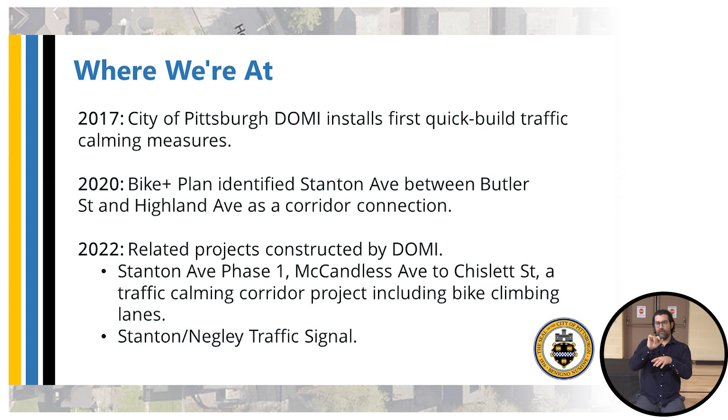So real quick, the purpose of the meeting is to share the safety context and planned improvements along the Stanton Avenue corridor between Chislett and Heberton and Meadow Street. Some of the project background: in 2017, the Department of Mobility and Infrastructure installed quick build traffic calming measures. In 2020, the Bike Plus plan identified Stanton Ave between Butler Street and Highland Ave as a corridor connection, and you'll see that on a map in a second. Adjacent projects were completed in 2022, Stanton Ave Phase 1, which is the climbing lane from McCandless to Chislett, as well as traffic calming. And the Stanton-Negley traffic signal was also completed in 2022.

In 2023, Council District 7, Councilwoman Gross secured funding for Stanton Avenue Phase 2. DOMI started data collection on the project. Last fall, we held a corridor walkthrough with folks from the neighborhood, the council offices, as well as the mayor's office and DOMI. And then, as most of you have seen, in the fall DOMI installed Phase 1 of Phase 2, which were the speed tables between Highland and Meadow.

Now in 2024, hopefully you all have been aware of the news that the city, the mayor's office, and council are recommitting to Vision Zero. Part of that was thorough analysis of our city streets to identify what DOMI is calling the high injury network. It's 10%, I think, of road miles where 80% of our accidents are. And so DOMI's really trying to be proactive in addressing safety issues throughout that high injury network.

DOMI also began Stanton Ave Phase 2 project design, which you'll be seeing today. Just a reminder for folks, the scope of the project is Stanton Ave from Chislett to Heberton with quick build materials. I'm sure we'll hear from folks who are interested in things like traffic signals, but this is really a quick build corridor safety project. And the goal is to calm traffic, improve safety for pedestrians, cyclists, but really all users on Stanton Avenue.

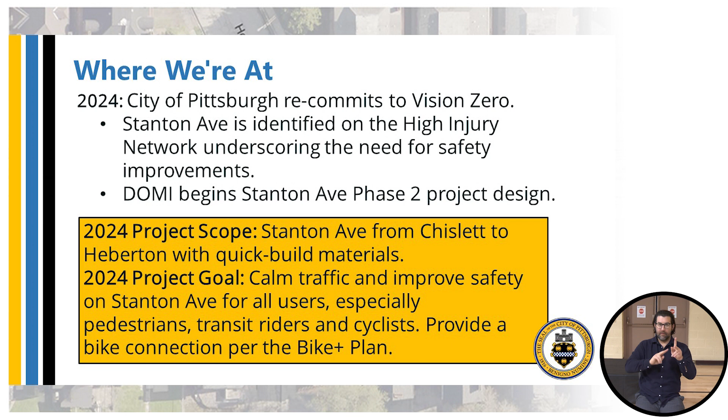Just another quick word about Vision Zero before I hand it off to Paige. We're really on the heels of a really tragic situation in the city of Pittsburgh. 21 people died in our city on city streets last year. And DOMI is really trying to take a chunk out of addressing those safety concerns, which is why we're starting with projects like Stanton Avenue, which are on the high injury network.

Fortunately, we know that things like slowing people down, adding safety elements, speed humps, making pedestrians more visible are things that reduce the number of crashes and especially reduce the severity of crashes. And Paige is going to talk a little bit more about that in the presentation now.

Thanks, Jan. And thank you all for being here today. I know it was a really beautiful day outside, and I appreciate you making the time to be here.

So to give some more context to the street, I know most of you live around here, and this is not news to you, but for those of you that aren't fully aware of the context, I thought it'd be good to go over it. Stanton is a main thoroughfare between mostly residential neighborhoods, although there's a lot of businesses and community centers like this along the corridor as well. There's also a lot of transit access, which I think is an important factor here, not only for East Liberty and Highland Park, but also Stanton Heights and Morningside and the surrounding neighborhoods.

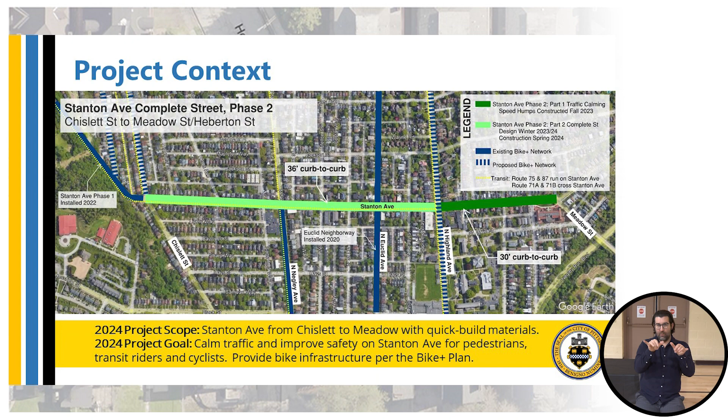So our current conditions are pretty straightforward: 2 parking lanes and 2 travel lanes in the Chislett to Highland area, but then as it goes past, there's 1 less parking lane. It's a little bit narrower. Data that we have collected shows that 85th percentile speed, which is our standard measure, is 32 miles per hour with 68% speeding with current conditions between Chislett and Highland.

And then on the Highland to Heberton part, we initially had 30 mile per hour 85th percentile speeds with 48% speeding. We've already seen a pretty dramatic reduction in that with the installation of the 2 speed tables last fall. So we brought the 85th percentile down 5 miles per hour to 25 miles per hour, at the speed limit, and 28% speeding. We are proposing further traffic calming along there that we'll dive into, so we're hoping that we can bring these speeds down even further.

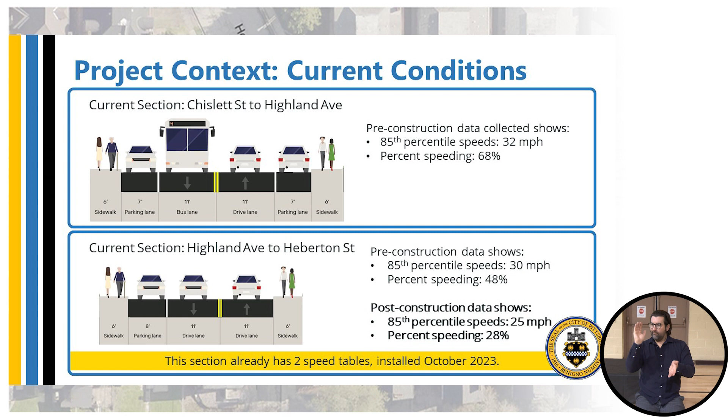I think it's important to set this up by looking at the crash history. There's a lot of crashes here. It's no wonder that this ended up on our high injury network. We tend to pick a 5-year period to be our common analysis, and 47 reported crashes in less than a mile is a lot of crashes. That included 2 bicycle crashes that resulted in 1 injury and 1 fatality, and 4 pedestrian crashes that all resulted in injury.

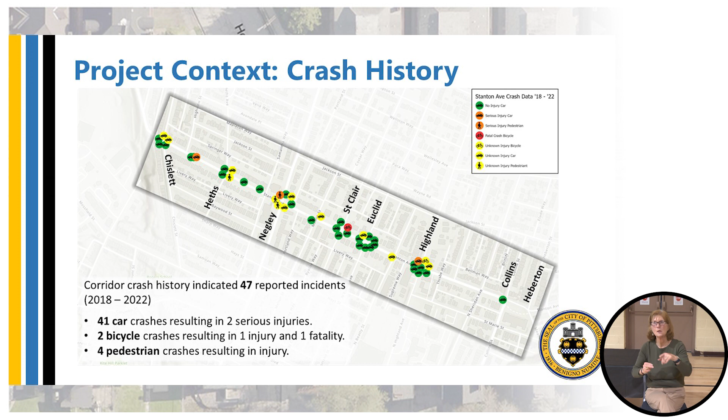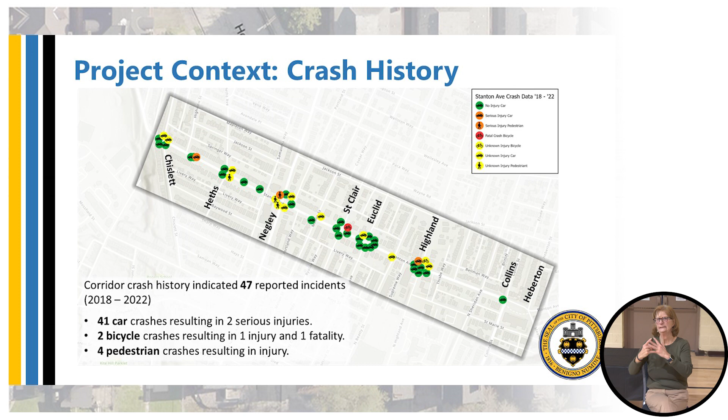Actually, if you could go back real quick, I forgot to say one thing. One other thing I just wanted to note is they're very concentrated between Chislett and Highland. We actually have a pretty big drop-off in crashes once you go past Highland. And the other thing I'll add is that the intersection with the worst crash history is Negley. We are proposing safety improvements there, but this crash data was all collected before we updated the traffic signals, so we're hoping that things are already looking better there, but we haven't been able to analyze that fully because it hasn't been long enough.

So the tools that we have for traffic calming that we're proposing here, the primary ones are always going to be about reducing corridor speeds. So when we collect data, it's always going to be mid-block on the corridor so that it's the average speed throughout the corridor. We'll never collect data right at a speed hump. But we've collected a lot of data while we've been doing traffic calming at DOMI, and we've seen a lot of really good results. We're proposing speed tables on Stanton, which are similar to speed humps, but a little less aggressive.

They're much better for buses and for the high volumes that we have on Stanton. And in other projects throughout the city, we've seen a 7 mile per hour reduction in 85th percentile speeds with these treatments and a 56% reduction in percent speeding.

We've also analyzed bump outs and pedestrian islands, which we classify as horizontal deflection. So rather than a bump over, it kind of forces you to slow down by forcing you to move horizontally through the intersection. These are great because they focus the calming at the intersection. Intersections are where 2/3 of crashes occur, so they're the most important place to see these updates.

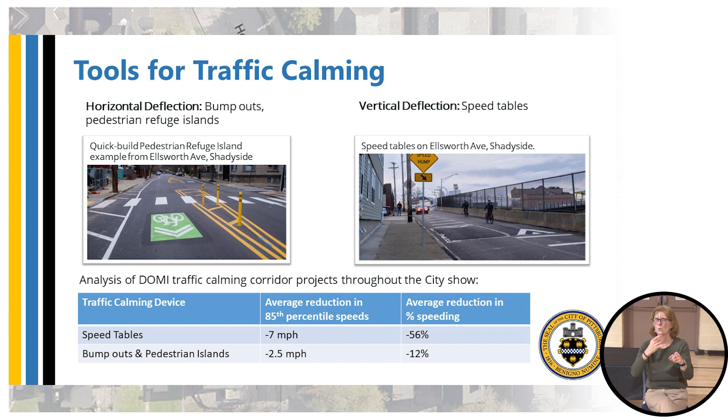And they also can improve sightlines at the intersections and make it easier for pedestrians to cross, especially an uncontrolled crossing, which means there's no traffic signal or stop sign, because it allows you to cross one leg, have a moment of refuge, and then continue crossing the intersection. So we're proposing these at many of the intersections on Stanton, as you'll see.

Some other tools for traffic calming. These are all specific ones that were called out in the Federal Highway Administration's safety proven countermeasures, and things that you'll see throughout the corridor. Adding bike lanes to a 2-lane local road has shown to reduce total roadway crashes by 30%, and that's all users, including pedestrians and motor vehicle crashes.

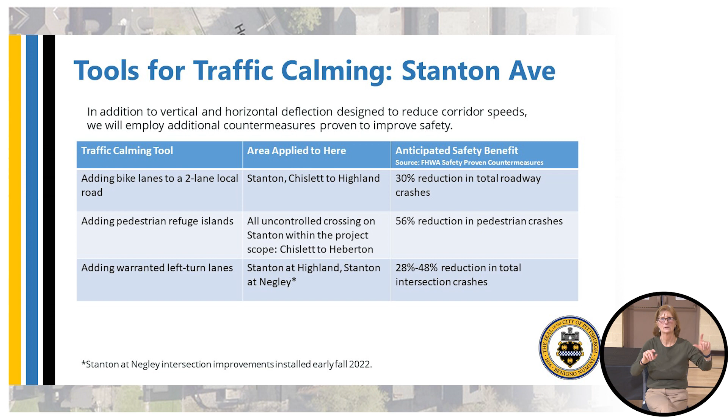Adding pedestrian refuge islands results in a 56% reduction in pedestrian crashes. And adding a warranted left turn lane to a signalized intersection typically reduces total intersection crashes by 30 to 50%, which is one of the things that we added to Negley when we made those safety upgrades at the intersection.

So what we're proposing on the corridor, the biggest change that you will see is that we are going to consolidate parking to one parking lane instead of the two that you currently have between Chislett and Highland, and add 2 bike lanes. We are proposing different sides of the street for which side we consolidate parking. The reason for that is that we know that bikes will be moving slower in the uphill direction, and there is a slight slope change around Negley in the average grade for these blocks.

So we think it'll be best to have the climbing lane, the uphill direction where bikes are moving slower, be the one that's closest to parked cars. And then if you're moving faster in the downhill direction, you'll have just the curb next to you with a little more predictable behavior. And then from Highland to Heberton, we're proposing a shared condition just with these additional traffic calming measures.

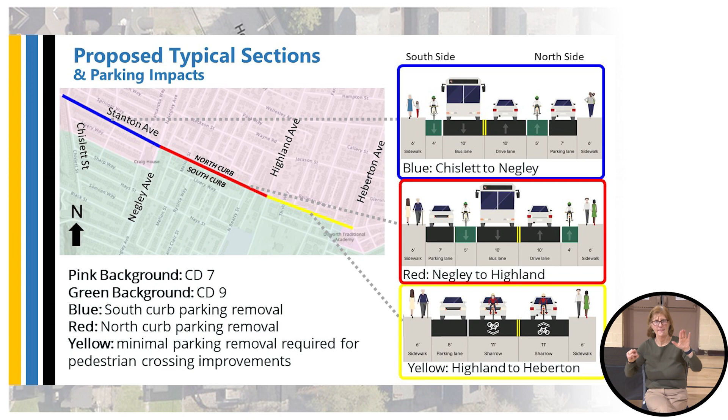So one intersection that we talked about a lot at the walkthrough with the community stakeholders is Heth's Ave. We think that some of the reasons for the less than safe and less comfortable conditions is the angle that Heth's Ave intersects with Stanton. And so we're going to use quick build materials to tee off the intersection and kind of force vehicles that are turning to do so more slowly.

Again, these bump outs are a good example of the improved sight lines where you can more easily see approaching vehicles before you make your choice to proceed into the intersection. It's also a really good example of that horizontal deflection with a pedestrian refuge island. This, like many intersections, is an intersection with a bus stop.

So we're working with PRT. Again, these are not final plans, but we're working with PRT so we can move the bus stop from this near side to the far side. That way we can provide additional protection to that bike lane around that corner with flex posts that we wouldn't be able to otherwise because it might prevent the bus from pulling to the curb. So we're going to work with PRT on all of these designs, but this is what we're proposing now. You also see the bidirectional bike lanes and an example of the speed tables.

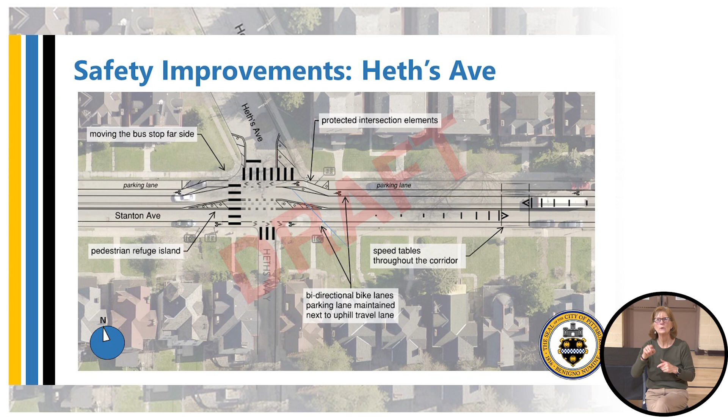Looking at Stanton at Negley, this is where you can see the shift in parking, which side it's on. We think that it's best to shift it at Samantha, and there's a few reasons for this. We're proposing a bus boarding island at the approach of Negley, which would, unlike the rest of this, be made out of concrete because it would need to provide that curb for ADA access and to the buses.

This will do a lot for the safety of the intersection because it will act similar to a bump out by constraining the curb-to-curb width as vehicles approach Negley, and stop some of the behavior we see with people squeezing around to make rights when we do have a no right on red sign there that is often ignored, while providing a lot of comfort for the transit users.

This is the busiest bus stop on Stanton in the project scope. It has the most boardings, so we think it's a good spot to concentrate some of our budget and offer improvements like this.

Oh, I'm sorry, one other thing. Also, we've been talking with PRT, and they're proposing bringing back the POGOH station here in 2025 or 2026. So we'll be working with them to try to find a good spot for that.

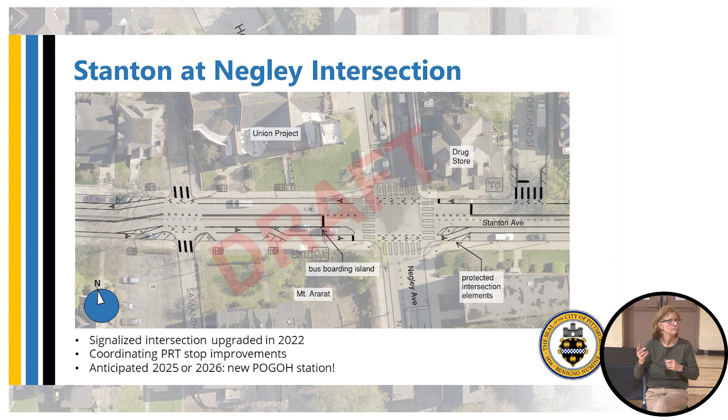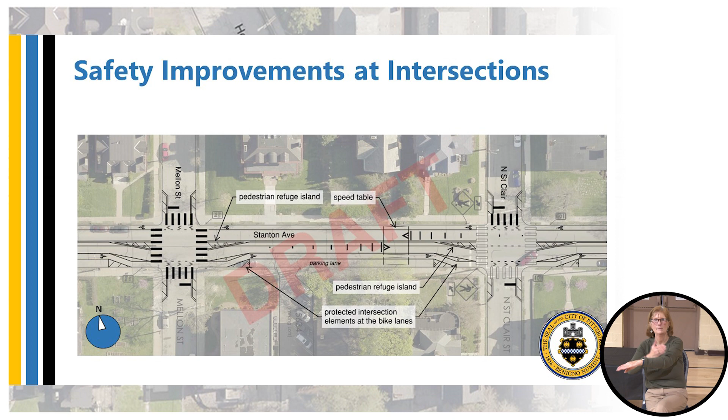I'm not going to go through every intersection, although, like we said, we will be posting the final designs once they're further along. But these are some really good examples of the uncontrolled intersections throughout the corridor. Again, we're proposing pedestrian refuge islands that offer that horizontal deflection we were talking about, the speed tables, some elements of protected bike lanes at the intersections, as you can see, with flex posts. And again, we'll be working with PRT to make sure that all of these work well with the transit.

Stanton at Highland was another intersection that we had heard a lot about at the walkthrough. A few of the other traffic engineers and I did multiple field views here, and we understand why it feels so uncomfortable and dangerous. There's a lot of turning vehicles at this intersection. So we are proposing adding the left turn lanes to North Highland Ave. The reason for this is it's an upgrade we can make that should, again, reduce total intersection crashes by 30 to 50%, according to FHWA.

And the reason it improves safety is because it improves some sight lines, it allows for more predictability, and we think it will increase yielding to pedestrian compliance, which seems to be one of the bigger concerns here, just given how many vehicles are turning. On Stanton, we're proposing protecting the bike lane at this approach, but maintaining the current configuration otherwise.

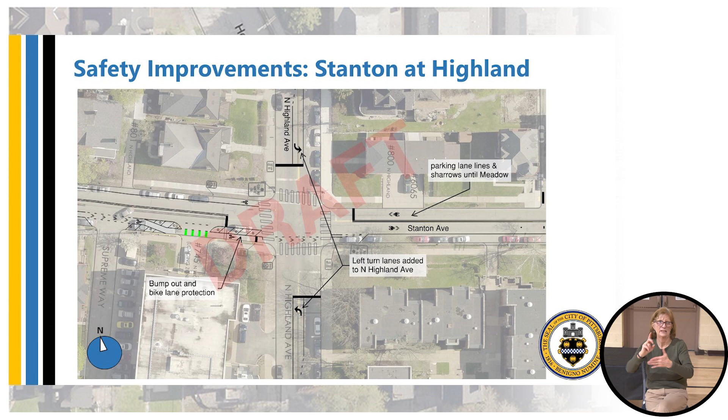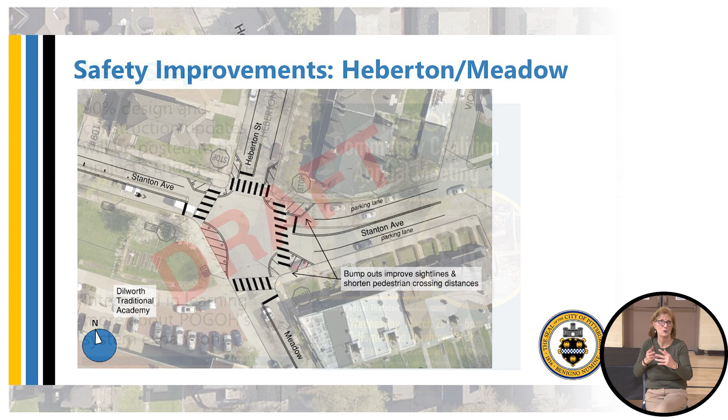So that's the end of the design. We'll take some questions. I think next steps is that we will again be posting some final designs as well as construction updates to the Engage page. So please keep an eye on that. I also just wanted to mention that on the 20th, POGOH is going to be having a large community coalition meeting where they'll talk about the full system expansion, not just the one at this intersection. Thank you.

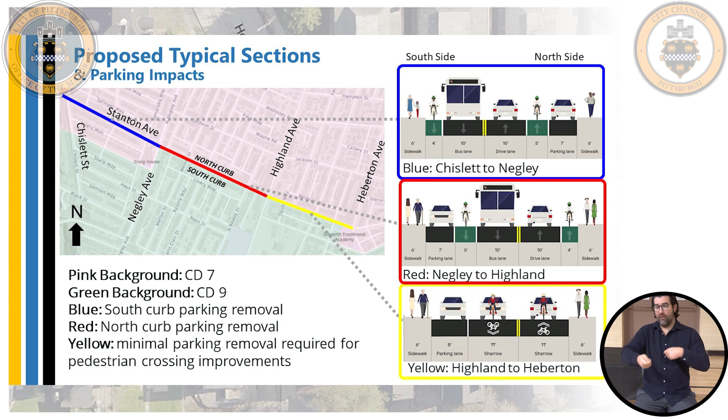There's a question here. Thanks for all the work that you're doing on this, but I don't know if you're strictly forced to just deal with roadways and curbs and traffic flow, but is there any way to incorporate more public trash cans when you're doing the redevelopment, installing the hardware, just because there are pedestrians and dogs around here? It'd be nice to have a few more public trash cans. So the question was about incorporating other things like public trash cans into the design. I'll let Paige give a brief answer, but the other resource I'll offer is our neighborhood services team, if there's spots where you think there could be trash cans, or you can submit that via 311, and it's something that our Department of Public Works can look into. But I'll let Paige talk about it from a project context.

Yeah, well, I don't have much more to add. I work in the traffic division, which does just work between curb and curb, but I think that that's certainly something that we can relay to DPW and our partners as something we'd like to see. I think especially maybe at that transit island. I know that's an amenity PRT likes to have in addition to their shelters, so we can definitely look into that.

All right, question on Zoom. Someone is asking, can you comment on why the intersection with the bus bump out requires cyclists to shift multiple times when traveling in the east direction? This seems like it could be a difficult turn to make, especially if there are people loading and unloading from the bus.

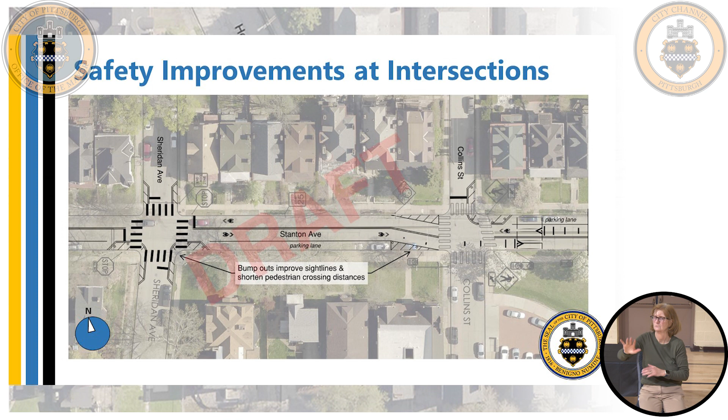I think what's going to be best is if we pull up that slide and maybe Paige can explain some of that better, and show where some of the parking consolidation is as well. It's the very last one. So here's Collins, where we have heard about some of these crossing issues. First, to reiterate, we're not proposing any changes to parking on this section of the street. There's a lot of problems here that are tough to sort out, especially when they're very short-lived. We certainly should be looking at more holistic approaches. I know the crossing guards are up against a lot.

The intersections crossing guards are at are some of the craziest intersections we've seen, and a lot of intersections don't get crossing guards because we're very limited and the schools are understaffed. So there's a lot that unfortunately can't be solved with traffic engineering. But if we can use these flex posts, and go out and do some field views after we've installed them to make sure people are not able to park on the sidewalk or in those bump outs as they approach these intersections, because, like we were talking about earlier with short people, we need those sight lines more than ever.

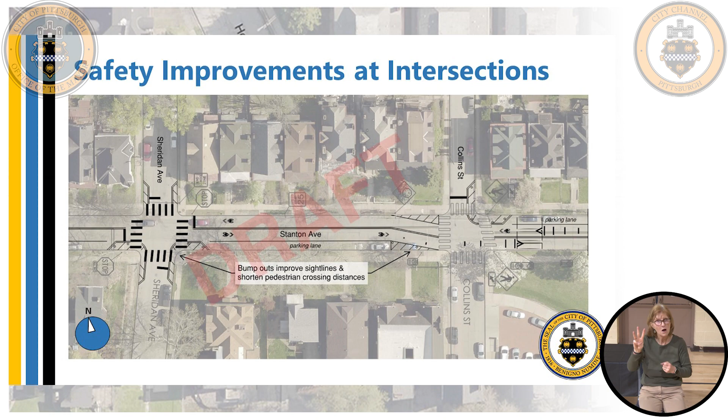So I think if we need to, analyze how this is working, see if we can work with police on targeted enforcement to make sure that those parking laws are being observed, and see what we can do, because I think the goal of this project is to reduce chaos. I know that sometimes there's too much chaos and maybe it'll become too much for the traffic engineering to really fix. But I do think that these designs will definitely not make the situation worse and should make it better, at least with what we can do within the scope of this project.

And if you have further follow-up, maybe we can connect you, because we do have people at DOMI who specifically are trying to solve some of these school pickup drop-off problems. It's not just you, it's like every school we look at, because I think there's this cyclical problem of it feels dangerous to walk, so everyone is driving their kids. So we do hope that by improving safety for people that want to bike their kids to school or walk their kids to school, that over time we can see an improvement, because this is a very common problem.

But I think we can commit to at least doing some, not only do we collect data afterwards, but we do field views after. So we'll make sure to come back here during school time. I know that not me, but one of my colleagues worked pretty closely with Dilworth in the past to figure out some of the busing issues already. So we have a working relationship with the school that should help. Before we move on, I just want to make sure you feel like your question was answered.

Okay. I think it's a really nice exploratory idea, but I think about all the data we're talking about, and I think it's really underestimating the pedestrian crossing dynamic here. So while I want to be very bike and other forms of mobility focused, I'm still very pedestrian, ground zero. Sure. And I just don't understand how this design addresses people that are underreported. Why can't it be like 5 points up in Squirrel Hill, where there's a 5-point intersection and a long light? There's no light there, right? True. No, there's definitely no light. But I thought we'd talk less of someday we'll observe retroactively, and more what's happening now. Paige, do you want to walk through exactly what the implementations of this are?

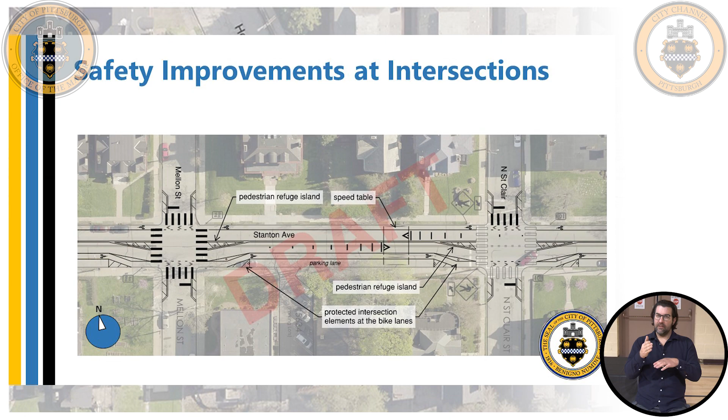Zoom question? Two questions. Could the bike lanes be parking protected instead of being exposed to traffic? And will there be a follow-up in the future to harden the existing changes or extend the bike lane further along Stanton? And they comment, extending the bike lanes toward Heberton would reduce the need to own or park a car on the street.

Okay, so the question online was about parking protected bike lanes. I assume most of the folks in here who are cyclists know what the concept of a parking protected bike lane is, but just for everybody else's knowledge, it's basically putting the bike lane between parked cars and the curb, using the parked cars as protection from moving vehicles. So I'll hand it off to Paige to answer that. I think the second part of the question was about extending the bike lane past Heberton on Stanton.

Yeah, that's a good question. The width here is about, I think we said 36 feet. So in order to provide a protected bike facility in both directions, there wouldn't be any parking left on the street with the existing curb to curb. So I don't think a parking protected bike lane would be strongly considered here.

If at some point things changed and we wanted to remove all the parking, that's the only way that we could do a protected bike facility. But it wouldn't be parking protected. It would use something like the concrete curbs you see downtown or flex posts, just because of the constraints in the curb to curb width.